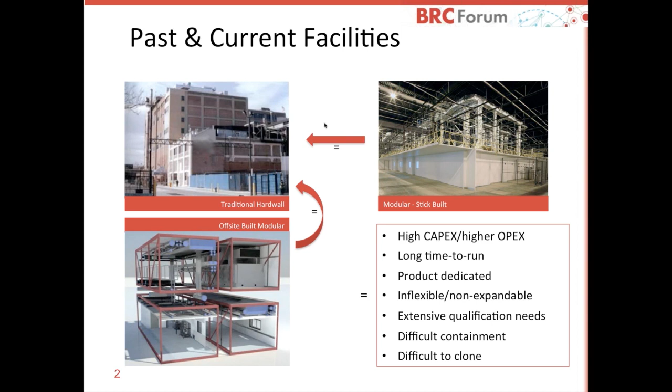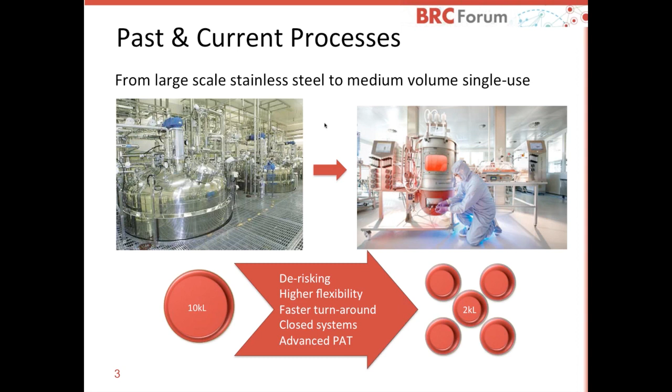When it comes to past and current processes, on the process side, not the facility, we really move away from the six-pack of large volume bioreactors more and more to single-use medium volume bioreactors, 2,000 liter, for example, a multitude of those, and then moving into a single-use process. But Morris will talk in more detail about the single-use processes.

But when it comes to single-use technology, what we have to be aware of is single-use processes are great, but often they try to be implemented in traditional facility layouts. And that's when suddenly the single-use technology flexibility and speed is again hindered by a typical classical layout, as you can see on the left-hand side. So we really need to look into new facility layouts which accommodate single-use processes and enhance the flexibility of these processes.

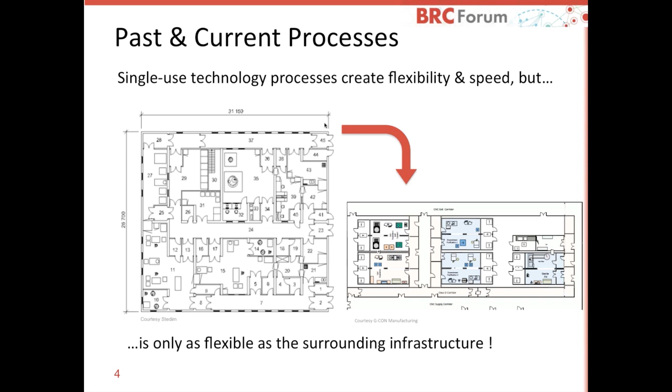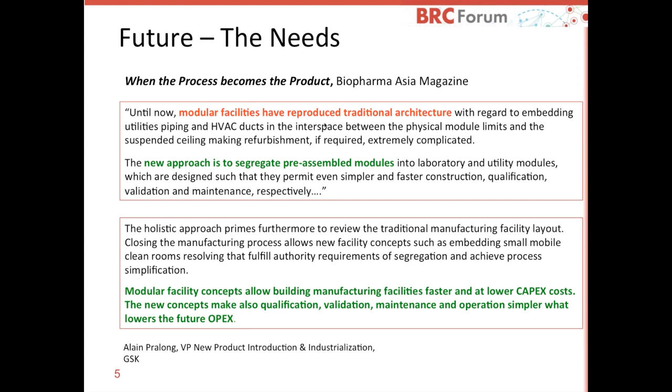What the needs of the industry are right now is really more flexible facilities, pre-assembled systems, pre-assembled clean room systems, for example. And this is a quote by Alain Pralong from GSK, a very nice quote in my opinion, because it's rightfully so. Modular facilities have really reproduced traditional architecture, and we need to be smarter in future and look at what can be done in regard to newer facilities, how we can become more flexible, and how we accommodate not just new processing technology, but also needs for in-country, for-country productions.

So the future possibilities are really gaining the full efficiency of the single-use technology, creating autonomous clean room spaces, not interconnected ones, which have their own air handling system, for example. Maybe movable infrastructures which are also fast deployable, prefabricated units, so we can build a shell building in parallel to the clean room structures and move these in once the shell building and the utilities are implemented.

Clonable facility platforms, so that you can have a cookie cutter principle and clone these facilities, and with that also the qualification and validation, and reduce your time to run of that facility. It's also more regulatory inspection friendly, because when the regulators know one of the facilities, they know the others which are cloned.

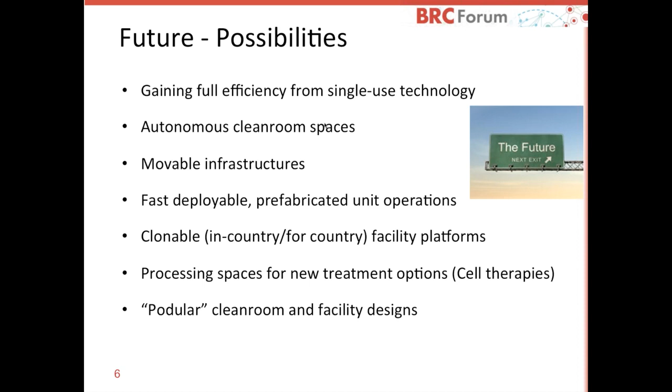And again, we have to look into new processing spaces when it comes to new treatment options, for example, personalized medicine. So we have to really look into smaller volumes and more rigid aseptic processing, because often you cannot sterilize by filtration or heat sterilize the reconstituted cell samples. So therefore, we have to look into new biomanufacturing possibilities.

This is just an example of a future facility platform. You can see on the upper right a 2,000-liter monoclonal antibody facility lined up, all single-use, enhancing the single-use process. And below, it's an oral solid dosage form facility. Again, all these systems are autonomous, segregated clean rooms, which have their own containment option and can also be vaporized hydrogen peroxide sanitized so that you can run multiple products through that facility.

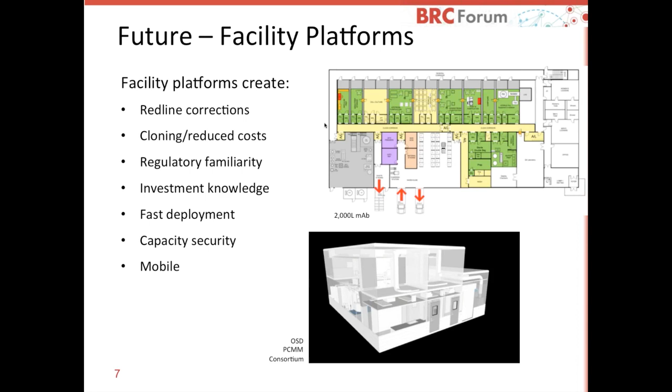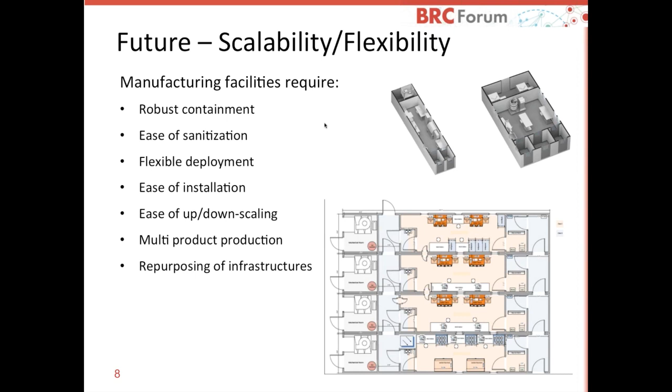And the next part would be how we can scale that type of flexibility. As you can see in this instance, the corridor system is included in a pod structure, and then one moves these pods against each other and scales the pods like that. So the time to decide whether you need to invest into your own infrastructure is reduced. You can delay that decision point because you can scale these systems easier since they are autonomous.

So with that, I would like to end my presentation and introduce Morris Phelan to you. Morris leads the global bioprocess services business at GE Healthcare. His global teams provide consulting, process development, clinical and scientific services, and expertise on a wide variety of applications to support large-scale manufacturing of biopharmaceuticals. Prior to GE, Morris worked as a principal at BioPharma Solve, providing consulting and professional services. From 1993 to 2011, Morris was the Director of Global Compliance Services and Regulatory Affairs, as well as the Director of Bioprocess Services for Merck KGaA and Merck Millipore.

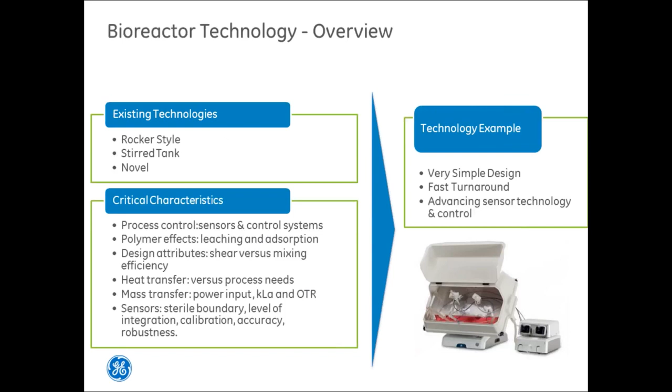I think there are a lot of things to consider, and I've touched on a few of them, but at the center of the entire discussion around implementing new technologies is the question of, do you shift patient safety, or do you shift the risks that are being taken around ultimately delivering a safe and effective drug to the patient by transferring and going to a new platform, a new technology? That requires a core understanding of the process, of the product, and then around aspects of product availability. But very quickly in the next layer, process control, control strategies, and supplier strategies are also extremely important.

And understanding core impacts of moving to a new platform, despite the fact that it has a compelling advantage from a flexibility standpoint and the obvious utilities of single use, it needs to be traceable back to a quality and patient upside, and then it's married up against business drivers. Built in is a qualification strategy, how it's implemented in your manufacturing, and then how it integrates with the rest of what goes on in the process in order to release a safe and effective drug.

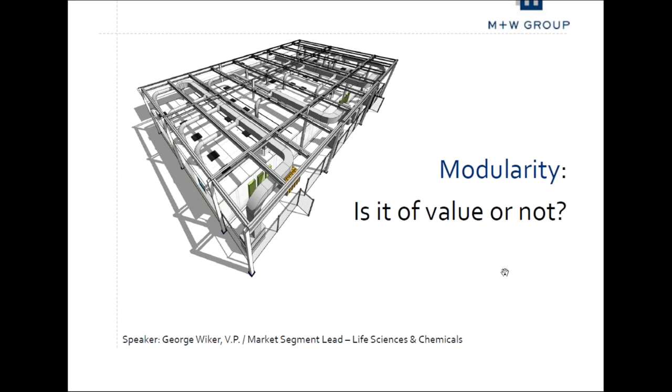I'd like to take a few minutes here and talk with you about modularity and what kind of value it can offer as an execution model as you seek to develop new bioprocess and pharmaceutical manufacturing capacity in the marketplace. So the question begs itself, is it of value or not? And the short answer is that yes, it is of value, that in the end you can look at the idea of modularity really being able to provide value from an execution standpoint. The first two bullets there are of particular importance to the business minds who want to look at modularity and say, really, what does it give me at the end of the day?

And what it does provide to an execution model is the ability to accelerate the schedule very rapidly. And in doing so, and in getting into manufacturing even earlier, one can realize a better net present value as a result. And as Mike touched on earlier, the predictability of a better outcome is also in play when you look at modular components and modular systems that can be implemented into an overall execution model that also provide a holistic solution here. So all these things that we look at in the world of modularity today really drive ourselves towards the efficient and repeatable approach.

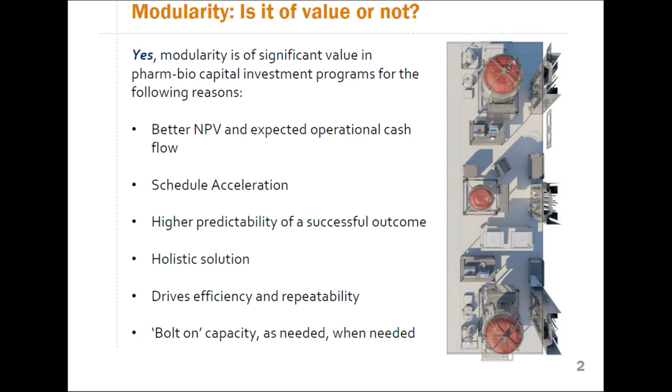And inevitably, as your business grows and changes, you can also look at bolting on capacity as needed when needed. So you're not pre-investing for infrastructure, rather you're waiting to make that investment later on as your business grows, and thus your operations can expand accordingly, and frankly, while keeping operations up and running. So your goal would be, as business grows, to keep the business running and expand as you need to. And this touches more on that. Basically at the end of the day, if you can look at implementing a modular execution approach and get into business earlier, you can realize an overall better cash flow in your operations. And that's the real benefit that modularity provides.

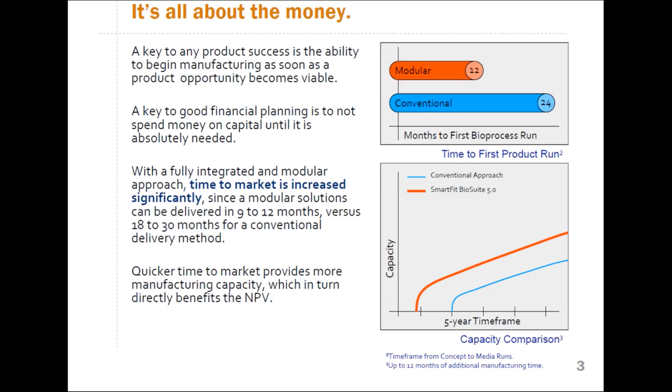And when you convert that into a net present value assessment, one could say that, honestly speaking, maybe modularity comes at a cost. In this case here, this model for the net present value comparison shows a stick frame project costing $8 million versus a modular facility costing $8.4 million. At the same time, though, we're able to realize a much accelerated approach on modularity, realizing a roughly 12-month time frame for the execution of the project versus up to 24 months. And so when you equate that down to a net present value comparison, you're seeing a significant value in the ability to get up and running earlier than you could otherwise by using a modular system approach.

And that's the real essence of modularity as I see it today, and the benefit that it can provide, coupled with what Morris was talking about relative to single-use technologies. The ability to bring in the equipment that Morris showed that can be sort of plug and play in theory and up and running very quickly to realize the overall operational system.

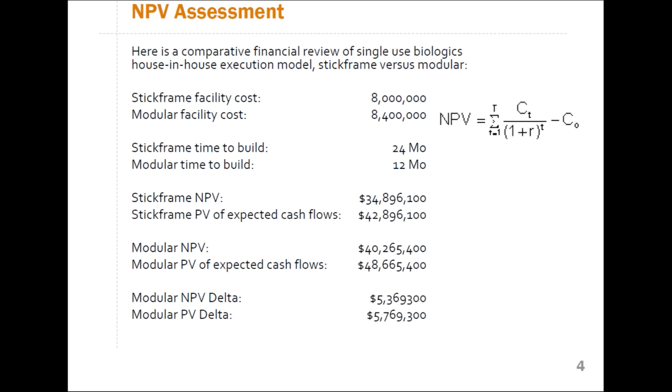With modularity, now we can look at the idea of really taking everything and going from what I would call day zero or point of sale and being able to execute elements in parallel sequence. At day zero, when you commit to buy or build a facility, Morris can get his equipment up and in manufacturing and fabrication for you very rapidly. Meanwhile, we're building modules that can be developed and set into a building shell or even become the building shell for that matter.

And then by using modularity as well, we can also look at the idea of having standardized C&Q templates and being able to carry the FAT, SAT, and commissioning data more efficiently forward to minimize their overall durations and even overlap some of the sequence of events there.

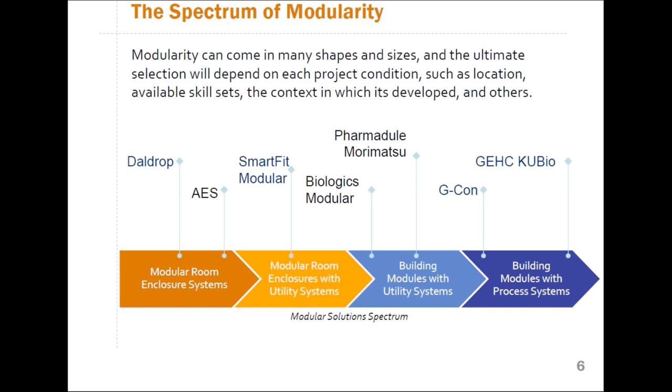So along with the idea of being able to build modular, I think it is also important to think modular too. And thinking modular to me would drive us toward the idea of standardizing our design modules and design thinking. So you can see here an example of what we developed at M&W called a life cell. And the life cell idea is really centered around being able to sit with a client and very rapidly model a process operation.

In this case here, you can see this is an XDR 2000 with all supporting equipment around it, and that can basically become a dialogue tool where we can sit with a client and very rapidly develop an entire process model, and then within a very short period of time, be it a couple of days or as much as a week, model a process and begin to determine how that process could be configured in a context that may exist or a brand new building shell, for example.

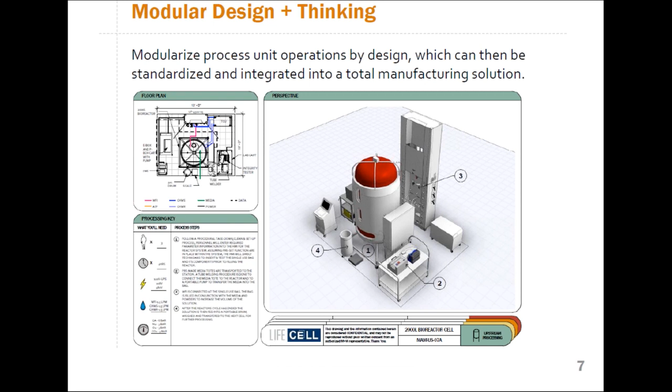And then you can take that idea and even begin to ratchet it up, modeling the process first, and then even taking it to the extent of being able to standardize rooms. In this case here, this is a LifeCell for a gown room. And the ability to now take all these pieces and components and plug them together and build a modular system by design initially that can then lead you very rapidly to a modular overall execution program

that can then be assessed very rapidly, because by having the equipment assessments already done, we have the cost of the equipment. By having modular systems here that you see for rooms, we now can get the cost and basic functional operations around those understood and clarified. So we have a very good picture at the end of the day of how that facility may look and how it may operate.

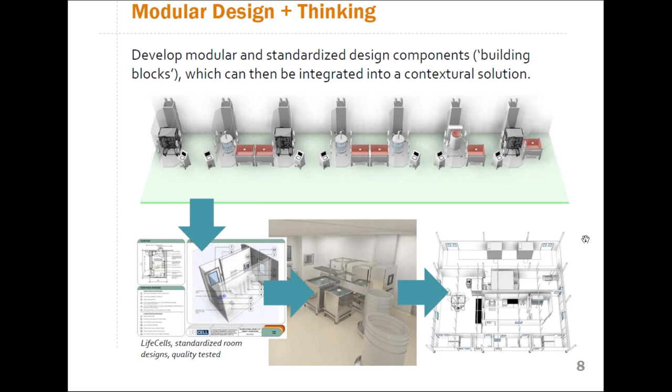So really, just to kind of summarize the overall approach, I think, as Mike said earlier, the ability to commit to spend later. Inevitably, clients today want to wait till the very last minute to spend the money because they want to make sure it's the right investment to make. So by using a modular approach and accelerating the overall project schedule, we can now look at spending money later in the overall development of a product, or get to market quicker by using modular systems here.

It also mitigates risk. It's important to note here that by using modular systems that are built in a factory and already sort of pre-engineered and copy smart approach, you can basically mitigate risk by not having to deal with contingency that you otherwise would have to deal with if you didn't have a known outcome for all those components. And certainly, and inevitably, with modularity comes efficiency.

So in terms of the ability to benefit operations, the maintenance folks, repeatability as well, it's very important to think of modularity not only from a small component or a building module, but also the entire operation and how we can begin to make things very efficient by design and construction and operation. And along the way, too, comes the ability, with the technologies that Morris showed earlier, in my opinion, to reduce the FTE count. If you can reduce the number of full-time employees by 10% or so by using an efficient process system set into an efficient building structure or building operation, you can really begin to drive down your operational costs as well as a result.

And then, as Mike said earlier, and Morris touched on it briefly as well, is the idea of repeatability. The ability to basically build a plant and then copy smart. As companies today look to globalize and begin to develop infrastructure in country for country manufacturing, the ability to develop a model and basically be able to repeat that model is a very important feature as you go forward and develop your capacity, even nationally or worldwide.

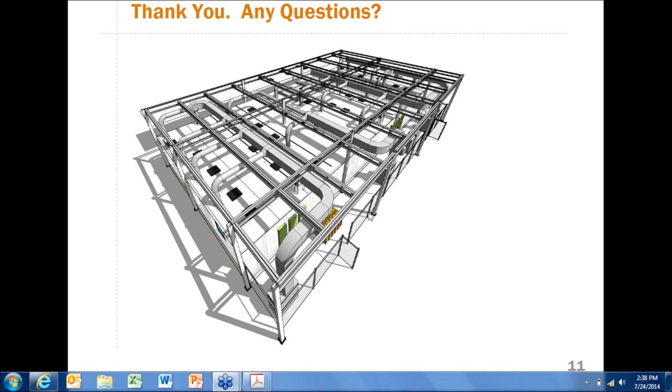We have some interesting questions coming through, and I will bring them up. The first one is: is flexible manufacturing implemented more for converting current facilities than for new greenfield projects? Thanks. Who would like to take that on? I think that's a really interesting question. Is it efficient, I guess, is the question, to take an existing process and move it toward modularity?

I think it is. This is George here to say that we've actually done it in the past. Imagine if you have legacy stainless steel processing and you want to begin to explore and implement the idea of single-use technology in a plant that exists. Using the sort of LifeCell approach that we showed earlier there, you can begin to take those systems and begin to integrate them and overlay them into a facility that may exist already with stainless steel processing. So you can thereby look at maintenance of legacy products, but also looking forward at the new technologies that may be able to make you more efficient in your manufacturing operations.

Yeah, I have to agree with that. I think, this is Mike. I think it's the beauty with single-use technology and also with the modularity, or with the prefab clean room structures we see, and the hopeful standardization of these systems also, you have a whole array of options which you can pull as a tool out of the toolbox. And we've seen definitely, when it comes to redesigning facilities, it's not just redesigning facilities but also new facilities, and both are possible.